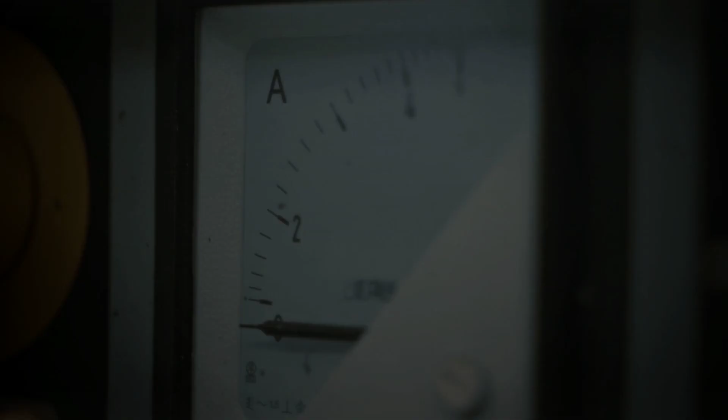The needles on their monitors crept upward. Then, criticality, a self-sustaining nuclear chain reaction achieved inside the TMSR-LF1, the Thorium molten-salt reactor, liquid fuel, Unit 1.

2 megawatts of thermal output, barely enough to power a few thousand homes, yet the number mattered less than the machine itself. For nearly 5 decades, no molten-salt reactor anywhere on Earth had run. The last one went dark in Tennessee in 1969.

Now, in a facility ringed by desert scrub and concrete blast walls, a design once abandoned by the country that invented it was breathing again, this time in China.

The location was no accident. Gansu's remoteness offered isolation for an experimental design still unproven at scale.

Instrumentation bunkers, radiation monitors, and redundant containment structures surround the site, built to contain a reactor unlike almost anything operating commercially today.

Inside, instead of solid fuel rods, a fluoride salt mixture laced with fissile material circulates as a liquid, carrying heat and radioactive byproducts through pipes engineered to survive extreme chemical stress.

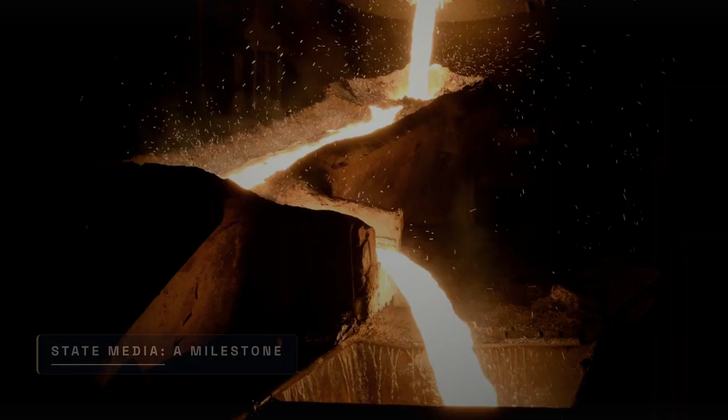State media called it a milestone in China's push toward energy independence. Western nuclear engineers called it something else: a resurrection.

The technology traces its bloodline directly to a Cold War-era American laboratory, where scientists first proved molten salt could sustain fission, then watched Washington shelve the entire concept in favor of other reactor designs.

60 years separate that laboratory from this desert. 60 years in which molten salt technology sat dormant in filing cabinets and technical reports, waiting for a nation willing to spend the money and time to rebuild it from scratch.

Why did the design that once ran successfully in Tennessee disappear for 2 generations, only to resurface now in the Gobi?

The answer begins not in China, but in a research lab in Oak Ridge, Tennessee, where the entire concept was born, tested, and ultimately buried.

In 1965, inside a squat concrete building at Oak Ridge National Laboratory in Tennessee, American scientists switched on a reactor unlike anything the nuclear industry had built before.

The molten salt reactor experiment, MSRE, contained no fuel rods, no water coolant, no towering pressure vessel.

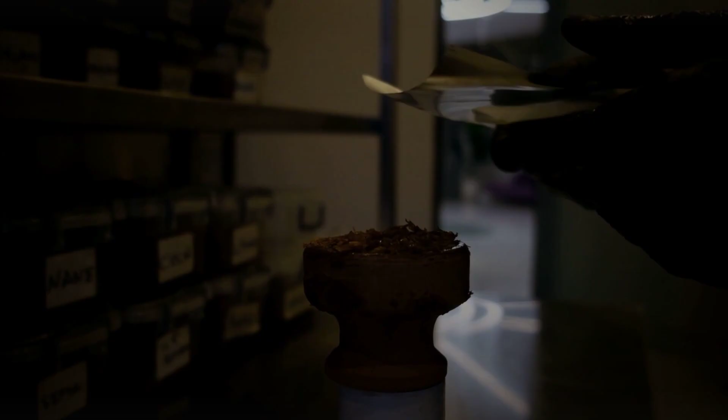Instead, a mixture of lithium and beryllium fluoride salts, laced with dissolved uranium, flowed through graphite channels at temperatures near 650 degrees Celsius, glowing faintly orange as it carried heat away from the core.

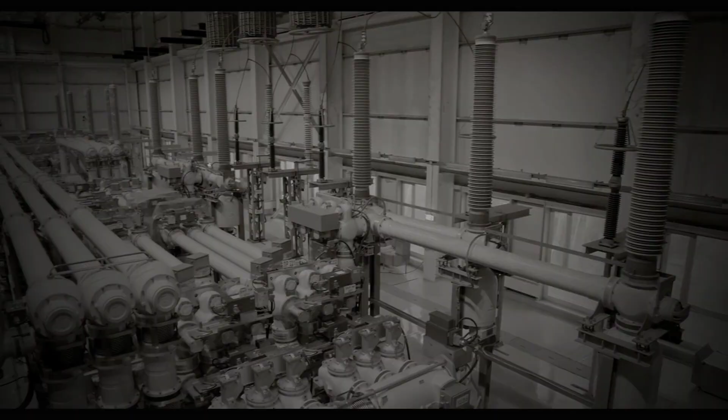Visitors described the pipes as warm to the touch, even through insulation, a detail then unheard of in reactor design.

For 4 years, the reactor ran almost continuously. Engineers logged more than 13,000 hours of operation, cycling through uranium-235 fuel, then...

uranium-233 bred from thorium, proving that a liquid fuel design could sustain fission reliably, refuel without shutdown, and survive the corrosive chemistry of molten fluoride salts using a nickel alloy called Hastelloy N, developed specifically for this program.

Alvin Weinberg, the laboratory's director, believed molten salt technology represented nuclear power's safest, most efficient future. He pushed for a follow-up, a 250-megawatt thorium breeder reactor that could have proven the concept at commercial scale.

Congress never funded it. By 1969, political winds had shifted. The Nixon administration consolidated federal reactor research behind a single technology, the liquid metal fast breeder reactor, a solid-fuel plutonium design.

This design was favored by weapons-adjacent research and a nuclear establishment already invested in conventional fuel fabrication infrastructure.

Weinberg lost his directorship in 1973 after continuing to argue publicly for molten salt. Funding for the entire program ended. The MSRE was drained, decommissioned, and left to decay in place.

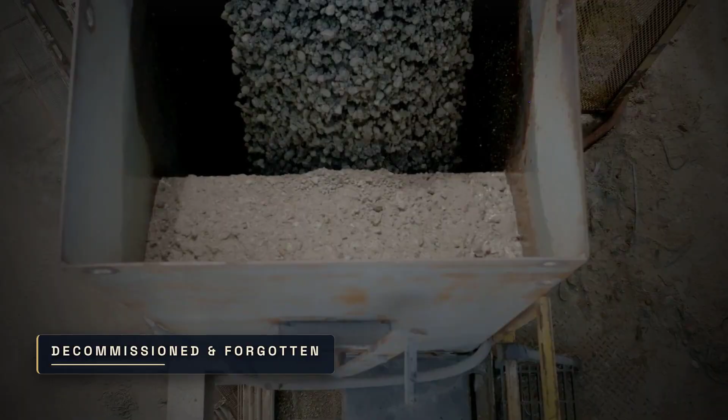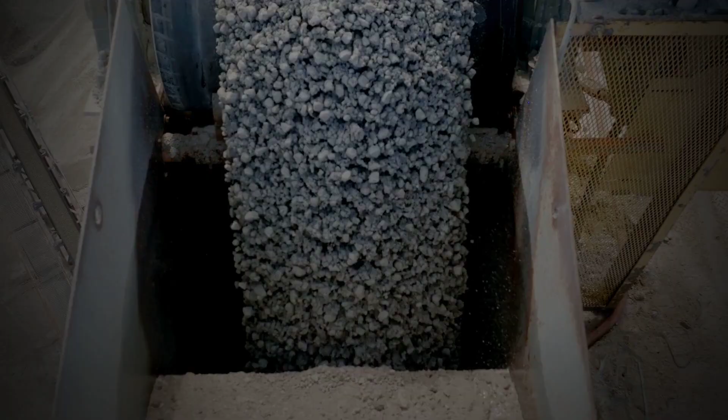Its technical reports, thousands of pages documenting corrosion rates, chemical processing methods, and operational data, sat largely unread in American archives for decades. 54 years passed.

No nation built another molten salt reactor. Then Chinese researchers, working from declassified Oak Ridge documents, began asking a question American policymakers had abandoned: what if thorium, not uranium, became the foundation of nuclear power's next chapter?

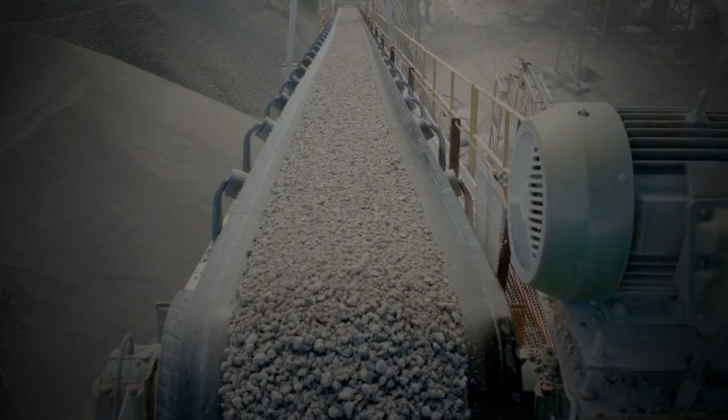The answer required understanding an element that occurs almost nowhere on Earth in a form ready to fission on its own.

Thorium sits quietly in Earth's crust, roughly 3 to 4 times more abundant than uranium-235, the isotope that fuels nearly every commercial reactor operating today. Geologists have mapped thorium deposits across India, Australia, Norway, Brazil, and the United States.

But China's reserves concentrate heavily in one place: Bayan Obo, in Inner Mongolia, an enormous mining complex originally developed for rare earth extraction.

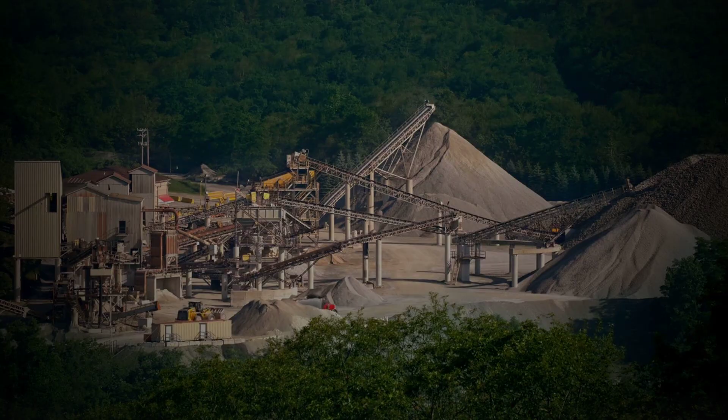Estimates place recoverable thorium there near 100,000 tons, a byproduct sitting in tailings alongside neodymium and other rare earth ores already mined for magnets and electronics.

That abundance alone explains part of thorium's appeal. Uranium-235 makes up only 0.7% of natural uranium, requiring energy-intensive enrichment facilities to concentrate it into usable reactor fuel.

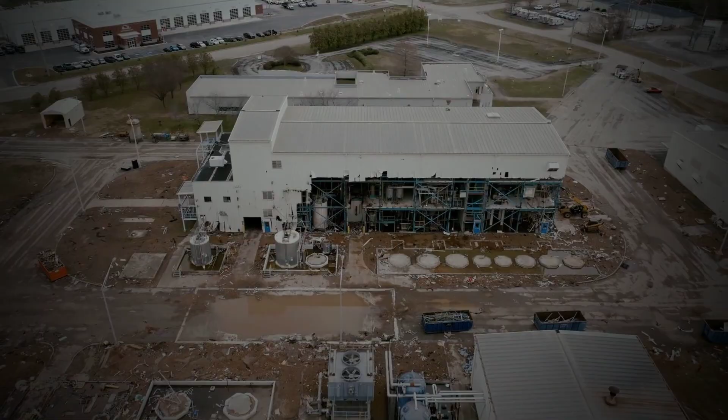Thorium-232, by contrast, exists almost entirely as a single isotope, eliminating the enrichment step altogether. For a country like China, sitting on thorium-rich mining waste with no established use, the element looked less like a rare resource and more like a stockpile waiting for a reactor design that could burn it.

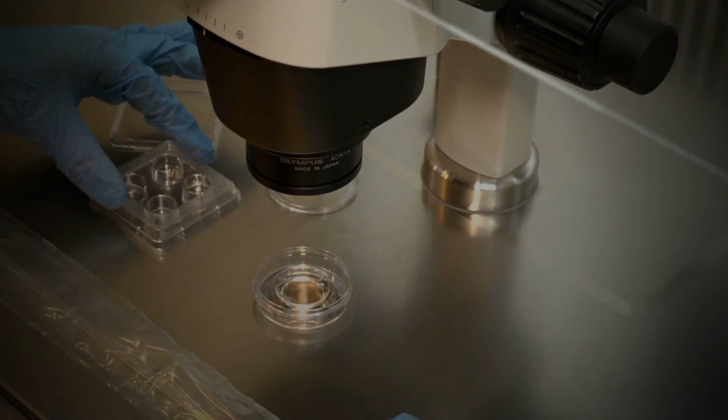But thorium carries a critical limitation. It cannot sustain fission by itself. Natural thorium-232 is fertile, not fissile. Dropped into a reactor alone, it does nothing.

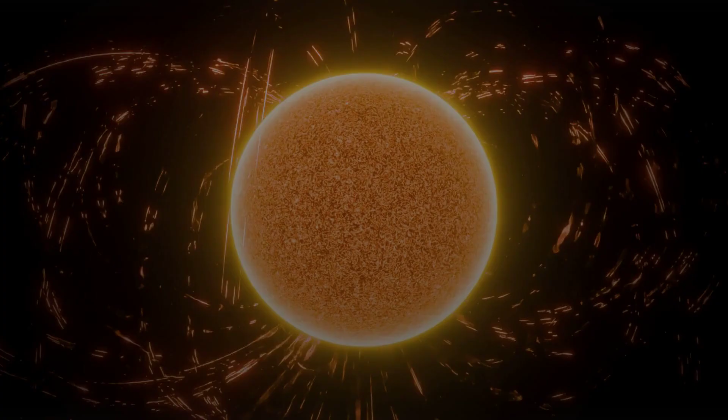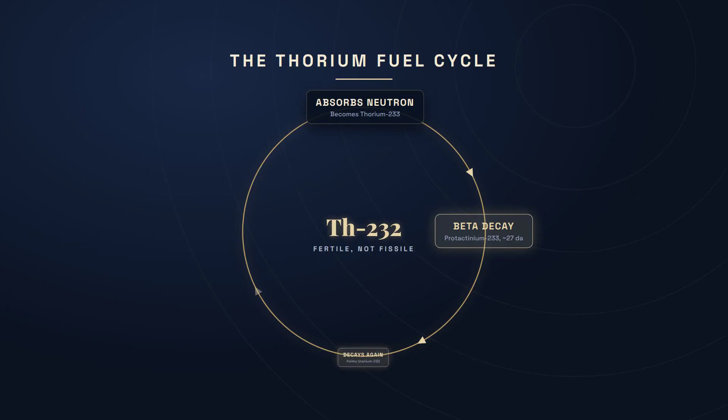To become useful fuel, a thorium-232 nucleus must first absorb a stray neutron, transforming into thorium-233, then decaying through protactinium-233 over roughly 27 days into uranium-233, the actual fissile material capable of sustaining a chain reaction. This means every thorium reactor needs a neutron source and an initial fissile driver fuel, typically enriched uranium or plutonium, to start the process and keep converting thorium into usable material.

Once running, a well-designed reactor can breed uranium-233 continuously from the thorium blanket surrounding or dissolved within its core, extending fuel supplies far beyond what the driver fuel alone could sustain. China's engineers built the TMSR LF1 specifically to test this transformation in practice, a working demonstration of thorium's slow conversion into fissile material inside a functioning reactor core, not just a laboratory calculation.

The next question was how to keep that fuel, now radioactive, chemically hostile, constantly transforming, physically present inside the reactor without ever encasing it in a solid rod at all.

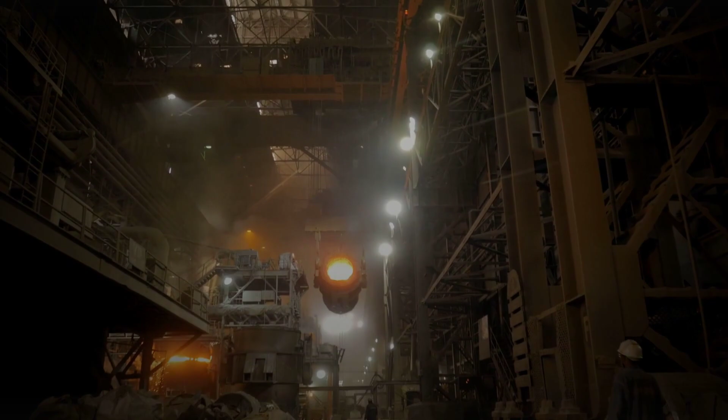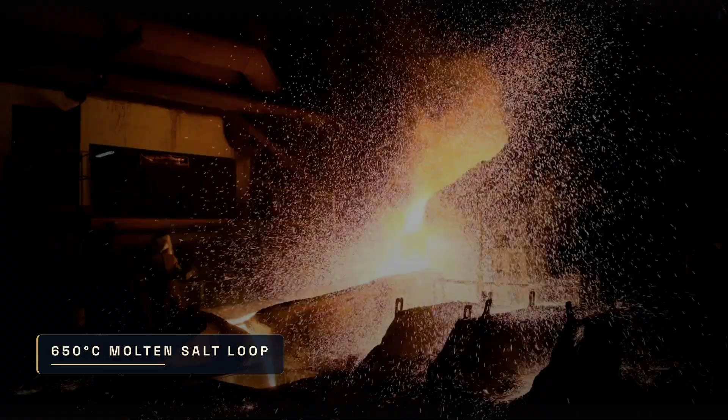Inside the TMSR LF1's core, there are no fuel rods, no zirconium cladding, no solid pellets stacked in bundles. Instead, the fuel itself is a liquid, a mixture of lithium and beryllium fluoride salts, technicians call it FLiBe, with uranium-233 dissolved directly into the molten mixture, circulating at roughly 650 degrees Celsius through a closed loop of piping and heat exchangers. This single design choice changes almost everything about how the reactor behaves.

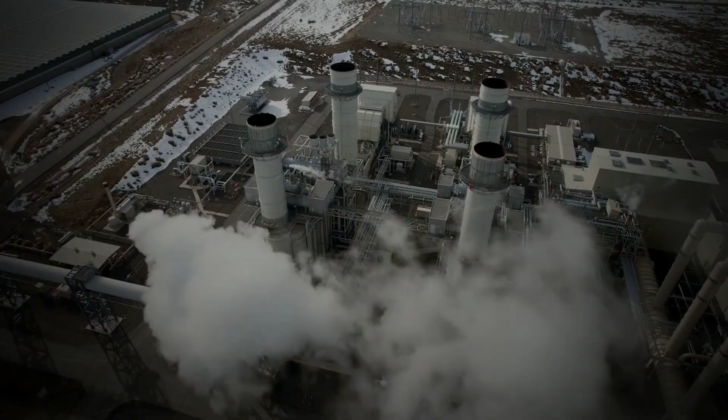In a conventional reactor, fuel sits fixed in place for months or years, sealed inside metal tubes that must be physically removed, cooled, and stored once spent. In the Gansu reactor, the fuel moves continuously, pumped through the core where fission occurs, then out into external loops where heat transfers to a secondary system, then back again, cycling roughly once every few seconds.

Because the fuel flows as liquid, operators gain a capability solid fuel reactors simply cannot offer. They can add fresh fissile material or remove problematic fission products without ever powering down the reactor. Xenon-135 and other neutron-absorbing fission products, which in conventional reactors gradually poison the fuel rods until refueling becomes necessary, can instead be stripped continuously from the circulating salt through a side process, keeping the core's reactivity stable for far longer stretches between major interventions. This continuous processing capability directly targets one of nuclear power's oldest bottlenecks, the refueling outage.

Pressurized water reactors typically shut down every 12 to 18 months, idle for weeks, while technicians swap fuel assemblies manually inside radiation-shielded pools. A molten-salt reactor, in theory, could run for years without that same interruption, chemically adjusting its fuel composition on the fly rather than replacing physical components.

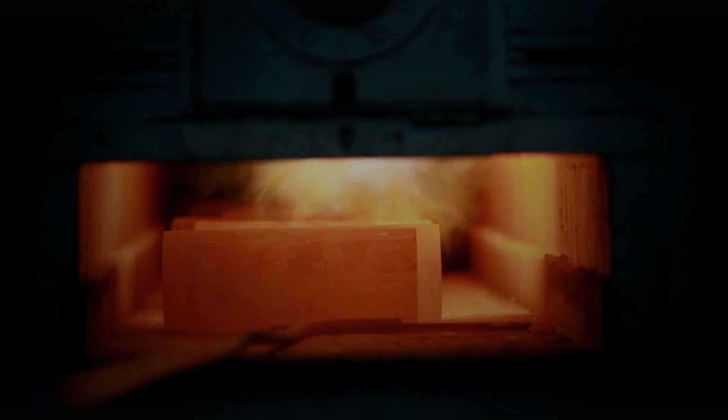But moving radioactive, corrosive, superheated liquid through pipes and pumps introduces its own set of engineering demands, unlike anything found in a conventional plant. Every valve, weld, and heat exchanger surface sits in direct, continuous contact with molten fluoride salt carrying intensely radioactive material at temperatures hot enough to soften ordinary steel. Keeping that fluid contained without leaks, without pressure buildup, without corrosion eating through the walls would define the entire engineering challenge that followed. And the very absence of pressure that made this possible also came with a hidden mechanical price.

Conventional nuclear power runs on a brute force compromise. Water makes an excellent coolant and moderator, but at normal atmospheric pressure, it boils at just 100 degrees Celsius, far too low to extract useful thermal energy for electricity generation.

Engineers solved this by crushing the water under enormous pressure. France's fleet of 58 pressurized water reactors operates coolant loops at roughly 155 atmospheres, pressure found more than a mile beneath the ocean's surface, forcing water to remain liquid above 300 degrees Celsius.

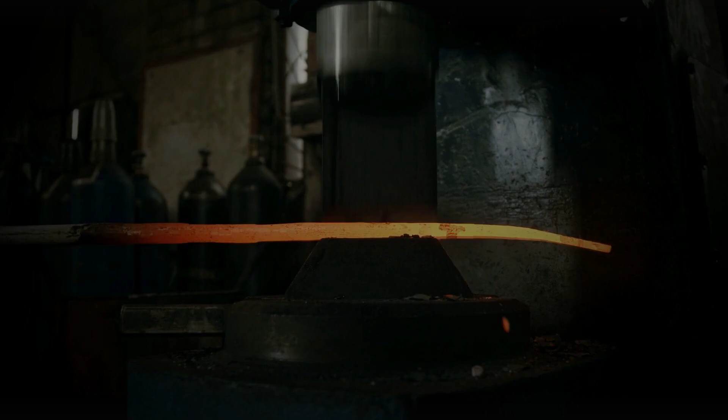That pressure demands enormous engineering overhead. Reactor vessels must be forged from steel walls, often exceeding 20 centimeters thick, capable of containing a catastrophic failure without rupturing. Pipes, valves, and pumps throughout the primary loop require pressure ratings far beyond what any other industrial process typically demands. A pressurized water reactor's containment building, that familiar concrete dome recognized around the world, exists largely to survive the consequences if that pressurized water loop ever fails catastrophically, flashing instantly into steam.

Molten salt eliminates this problem entirely, not by containing pressure more effectively, but by removing the need for it. Fluoride salt mixtures like the FLiBe compound used in the TMSR LF1 remain liquid at ordinary atmospheric pressure across an enormous temperature range, staying fluid well past 700 degrees Celsius without any need for pressurization at all.

The reactor's operating temperature near 650 degrees Celsius sits comfortably within that liquid range, achieved without a single atmosphere of excess pressure applied. This single difference reshapes the entire mechanical philosophy of the reactor. Vessel walls at Wuwei carry a fraction of the mechanical stress found in a pressurized water reactor's primary loop, since there's no driving force pushing to rupture the container beyond its intended shape.

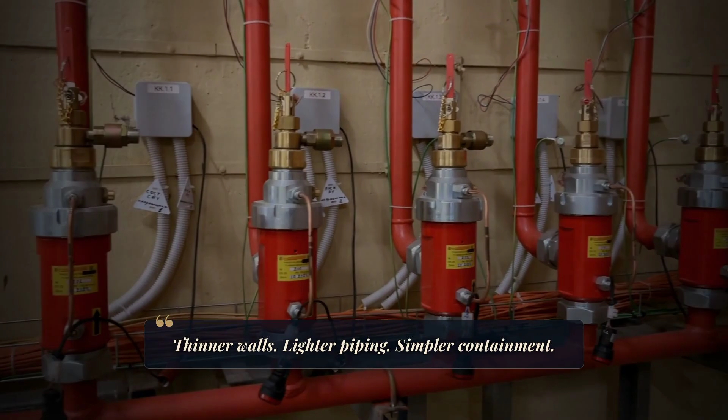Thinner walls, lighter piping, and simplified containment structures become possible, translating into potentially lower construction costs and reduced risk of the sudden, explosive depressurization events that have driven safety design in conventional nuclear plants for 70 years.

But building a reactor with drastically reduced pressure risk doesn't eliminate risk altogether. It shifts it elsewhere into different failure modes entirely. What happens if cooling systems fail, pumps stop, and that superheated radioactive salt has nowhere to safely go? The answer sits beneath the reactor core itself, in a component with no moving parts at all.

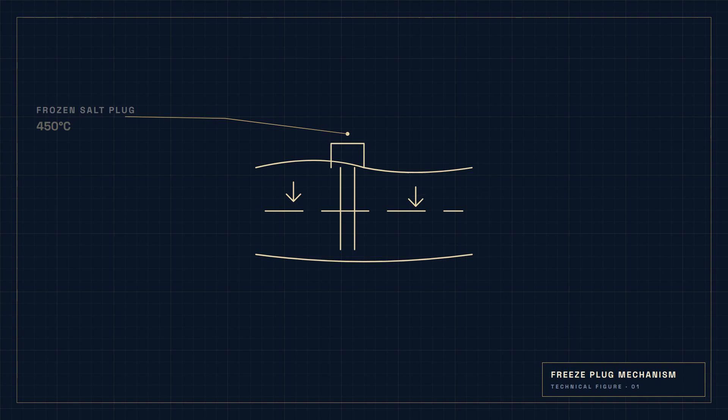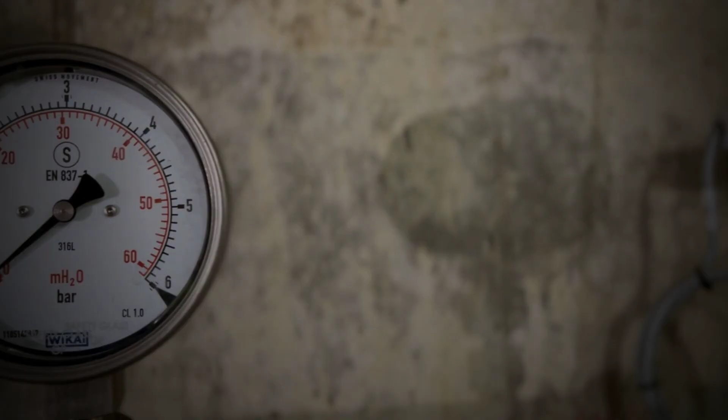Beneath the core of the TMSR LF1, hidden in the reactor's lower plumbing, sits a small section of pipe no wider than a fist. Inside it, a plug of frozen fluoride salt blocks the path to a set of dump tanks buried further underground. That plug stays solid for one reason only: a small electric fan blows continuously across the pipe, holding the temperature just below the salt's freezing point of roughly 450 degrees Celsius. It is a strange kind of safety system because it depends on staying cold rather than staying powered up in the usual sense.

Cut the electricity and the fan stops. Without airflow, residual heat from the reactor itself creeps into the plug within minutes, and the frozen salt begins to soften. Once it liquefies completely, gravity does the rest. The entire radioactive fuel load, still dissolved in its carrier salt, drains downward through the open channel into passively cooled tanks designed to spread the material thin and shed heat on their own, with no pumps, no valves, and no operator required to throw a switch.

Engineers at the Shanghai Institute of Applied Physics call this a walk-away safe design, and it stands in sharp contrast to the elaborate emergency cooling systems required in pressurized water reactors, where active pumps must keep circulating water even after shutdown to prevent meltdown. Fukushima's 2011 crisis unfolded precisely because those pumps lost power. The freeze-plug removes that dependency entirely.

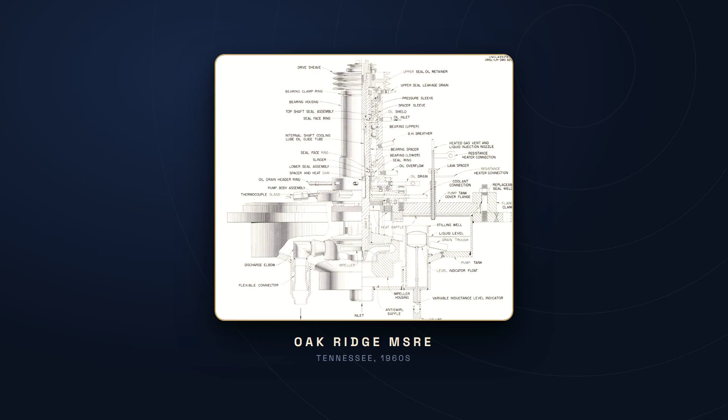The failure mode is not an accident to be prevented. It is the shutdown mechanism itself. Oak Ridge's original molten-salt reactor experiment used the same trick in the 1960s, draining its fuel into tanks every night during shutdown tests, over and over, without incident.

China's engineers have now rebuilt that concept with modern sensors monitoring plug temperature in real time, feeding data back to control rooms above ground in the Gobi Desert.

But passive drainage solves only the danger of losing control over heat and radiation. It does nothing to address a separate, quieter problem lurking inside every molten salt design. What happens, chemically and physically, to the waste products still dissolved in that salt long after the reaction stops, and how much of that waste the world could actually learn to live with.

Spent fuel from a conventional uranium reactor remains dangerous for extraordinarily long stretches of time, largely because the process creates plutonium-239, an isotope with a half-life of 24,100 years that dominates long-term storage calculations at sites like Yucca Mountain in Nevada. Thorium fuel cycles take a different chemical path.

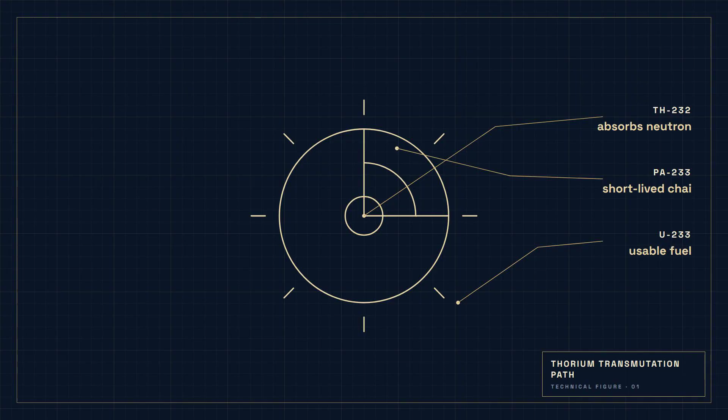When thorium-232 absorbs a neutron, it transmutes into uranium-233 through a short-lived chain involving protactinium-233, and this route rarely produces the heavy transuranic isotopes that make conventional spent fuels so persistent. Fewer neutron captures happen at the higher end of the periodic table, so less plutonium, americium, and curium accumulate in the waste stream to begin with.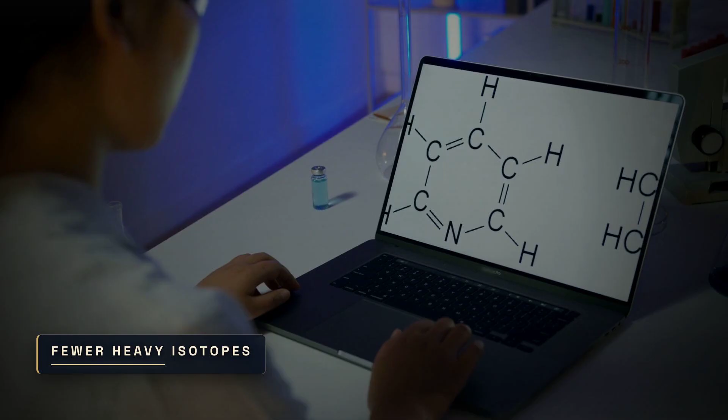Researchers at the Shanghai Institute of Applied Physics have modeled the resulting waste profile from the TMSR LF1 and published projections suggesting that residual radioactivity could decay to levels considered safe within roughly 300 years, compared to the tens of thousands of years required for uranium-plutonium spent fuel from reactors like those at France's Gravelines plant.

Three centuries is still a long institutional commitment, longer than the United States has existed as a nation, but it collapses the storage problem from a geological timescale to something resembling a multi-generational engineering project.

There is a second advantage tied directly to the liquid fuel itself. Because fission products stay dissolved in the flowing salt rather than trapped in solid rods, operators can theoretically extract specific isotopes continuously, pulling out xenon and krypton gases that would otherwise poison the reaction and separately isolating dangerous long-lived species for concentrated storage, rather than leaving everything mixed together in bulky spent fuel assemblies.

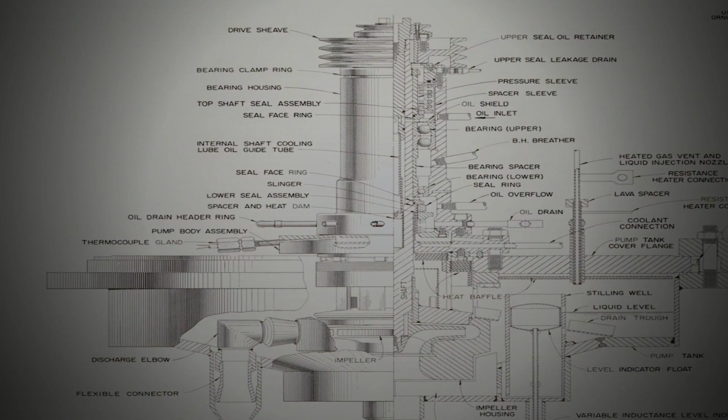Oak Ridge's original experiment demonstrated primitive versions of this gas-stripping process back in the late 1960s using helium bubbling. But smaller waste volumes and shorter half-lives on paper mean little until engineers can actually build a chemical plant capable of separating uranium-233 from a searingly hot, intensely radioactive salt mixture without destroying the equipment doing the separating.

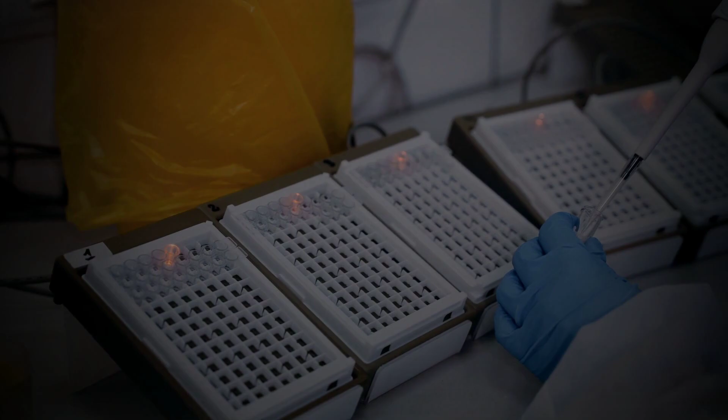And that engineering challenge exposes one of the ugliest secrets of molten salt technology. The very chemistry that makes this fuel cycle appealing is also what has been quietly corroding reactor components since the 1960s.

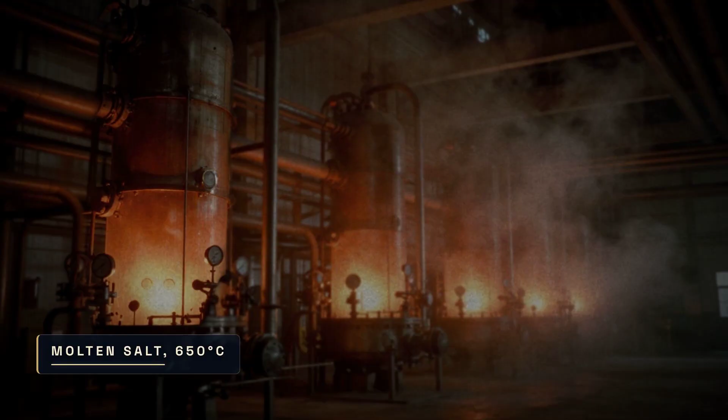Fluoride salt at 650 degrees Celsius does not behave like a passive liquid sitting in a pipe. It behaves like a slow chemical acid, and at Oak Ridge National Laboratory between 1965 and 1969, that chemistry nearly ended the molten salt concept before it could mature.

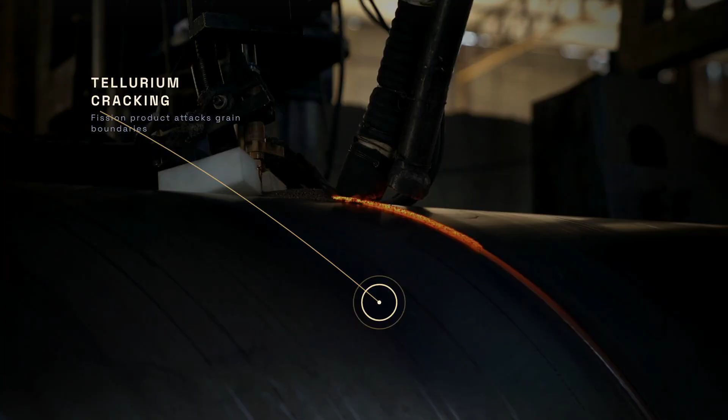Engineers there used a nickel-based alloy called Hastelloy N to build the reactor's piping, betting it could withstand fluoride exposure over the long term. Instead, fission product tellurium, generated continuously inside the circulating fuel, worked into microscopic grain boundaries in the metal and caused a specific failure mode researchers named tellurium cracking. Pipe walls thinned, welds became brittle, and components that should have lasted decades needed replacement within a handful of years.

The Oak Ridge team compensated by swapping sections during scheduled shutdowns, treating corrosion as a maintenance routine rather than a solved problem. And when funding disappeared in 1969 under Nixon-era energy priorities favoring solid-fuel plutonium breeders, the corrosion question went unanswered for 54 years. China's engineers inherited that unfinished chemistry problem directly.

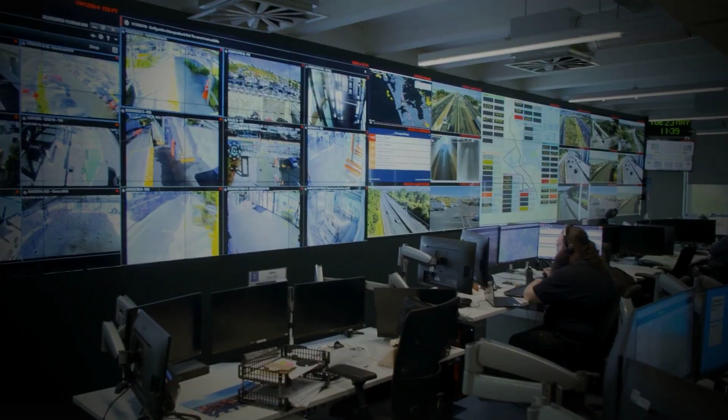At the Shanghai Institute of Applied Physics, metallurgists have developed modified nickel alloys with adjusted chromium and molybdenum content, aiming to resist tellurium infiltration better than the original Hastelloy N formulation. The TMSR LF1 also carries online chemical monitoring equipment that samples the salt continuously, tracking oxidation states and impurity levels in real time, so operators can adjust conditions before corrosion accelerates, a capability Oak Ridge's team never had access to in the 1960s.

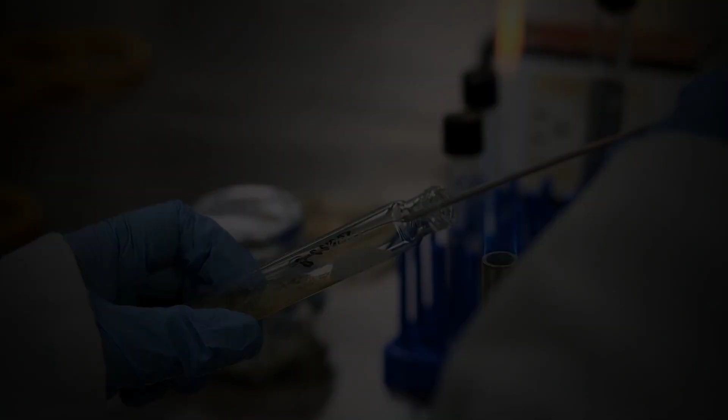Early results from the Gansu site reportedly show improved alloy performance, though the reactor has so far logged only a fraction of the 13,000 operating hours Oak Ridge eventually accumulated. No molten salt reactor anywhere in the world has yet run continuously for decades without major material replacement, and until one does, corrosion remains an open engineering question rather than a solved one.

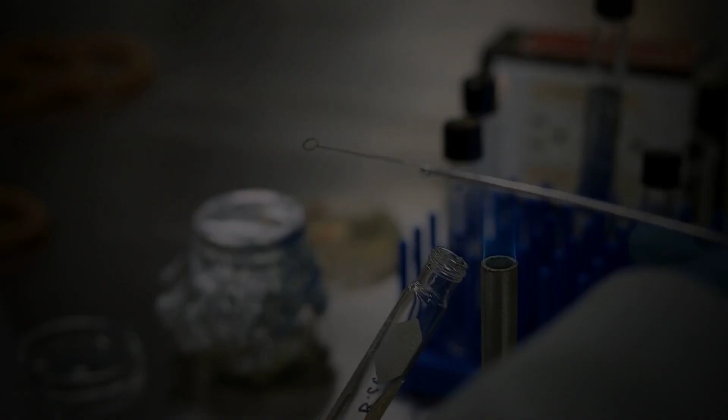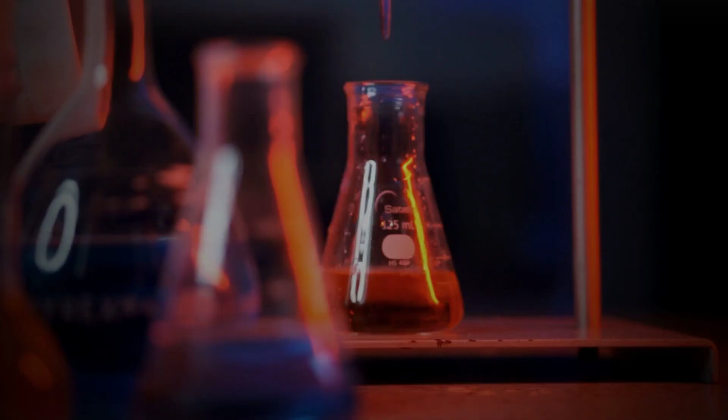That unresolved chemistry sits at the center of a much larger obstacle still ahead. Even a corrosion-resistant reactor produces spent fuel that must eventually be chemically reprocessed, separating usable uranium-233 from lethal fission products. And that separation step has barely been attempted outside a laboratory beaker.

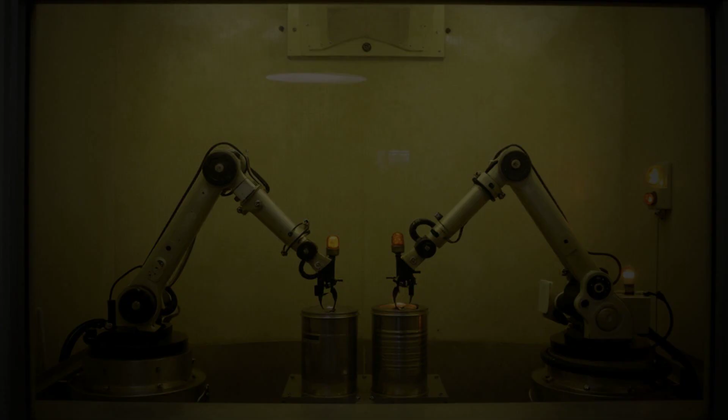Reprocessing molten fuel is not a matter of pouring liquid through a filter. Uranium-233 must be chemically separated from a mixture containing dozens of intensely radioactive fission products, some emitting gamma radiation strong enough to require thick lead and concrete shielding around any equipment that touches the salt.

Oak Ridge experimented with fluoride volatility separation in the late 1960s, extracting small test quantities under laboratory conditions, but never built anything resembling an industrial-scale plant before the program's cancellation.

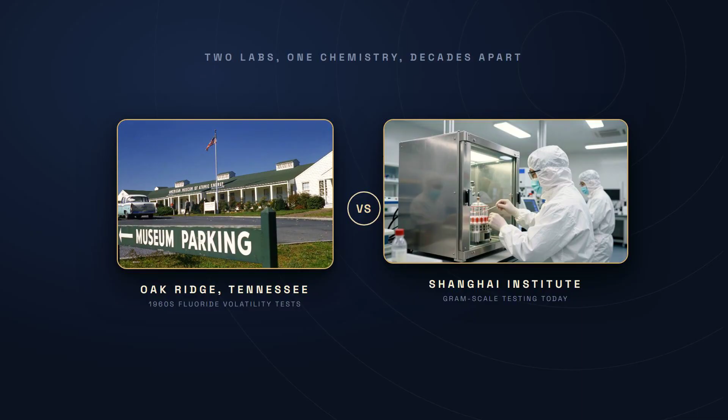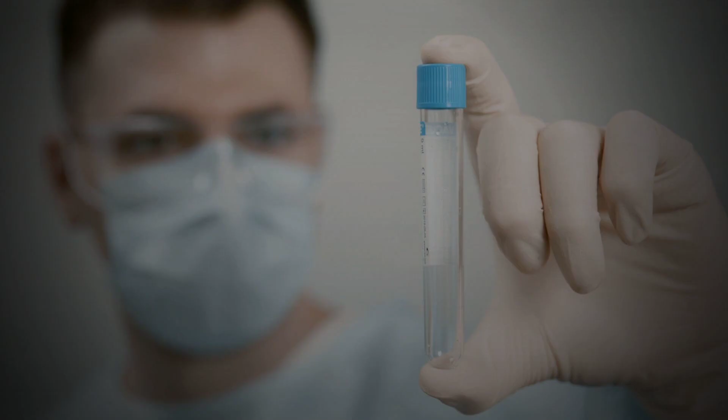China's engineers at the Shanghai Institute of Applied Physics have only just begun similar work, currently testing separation chemistry at gram-scale quantities inside shielded hot cells, a tiny fraction of what a working power plant would eventually process on a daily basis. Scaling that chemistry from grams to kilograms and eventually to tons means building remote-handling robotics, corrosion-resistant vessels for the separation process itself...

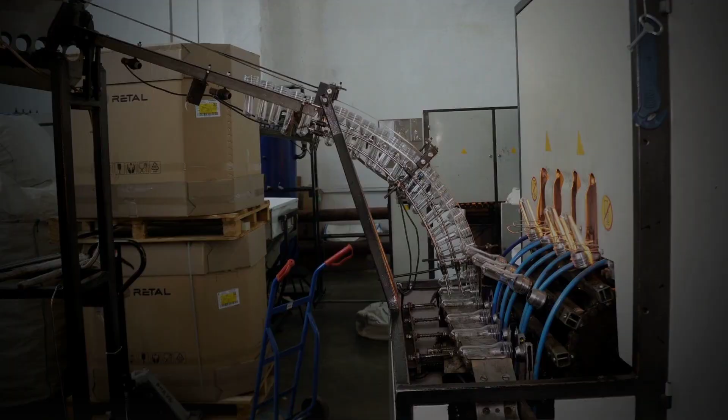...and waste conditioning lines to package leftover fission products for storage, none of which currently exist outside limited prototypes. The reactor engineering and the fuel cycle chemistry must advance together, and neither is finished.

Officials at Wuwei have outlined a deliberately incremental roadmap. After the 2-megawatt TMSR LF1 completes its test campaign, the next step is a 10-megawatt successor reactor, 5 times larger, intended to validate longer continuous operation, alloy durability under sustained neutron flux, and larger-scale reprocessing before anyone attempts a commercial unit.

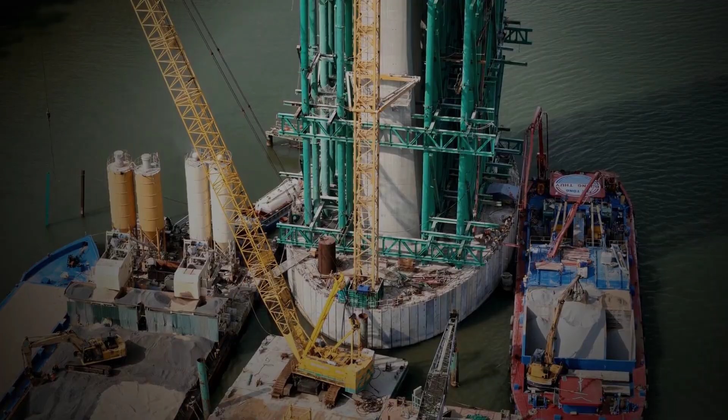Only after that intermediate reactor proves itself will engineers consider designs exceeding 100 megawatts, the threshold generally considered necessary for feeding electricity into a national grid at meaningful volume.

No public timeline commits to a specific year for that commercial reactor, a silence that speaks to how many unresolved variables remain in alloy performance, reprocessing throughput, and long-term operational data.

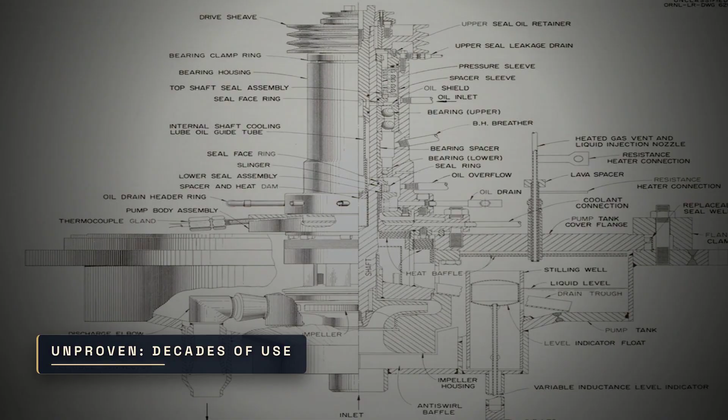What China has proven, decisively, is that a thorium molten-salt reactor can be built and brought to criticality in the 21st century using modern materials and monitoring, resurrecting a design the United States abandoned in 1969. What remains unproven is whether that design can survive continuous industrial operation for decades, process its own fuel economically, and scale to sizes that matter for global energy production.

The Gobi Desert facility exists to answer those questions one measured step at a time. This experimental reactor tests tomorrow's nuclear fuel today.